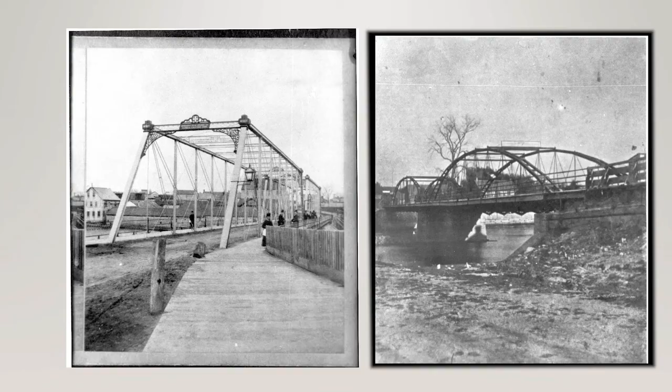For nearly 2 centuries, there has been a bridge across the Otonabee River at Hunter Street, linking downtown Peterborough with the village of Ashburnham, today more commonly referred to as East City. During the first 100 years, there were 4 variations of bridges, 2 wooden structures, and 2 iron bridges, all of which went from bank to bank, spanning 250 feet.

The second bridge, built across the Otonabee in 1846, was the impressive Howe Truss Bridge. This 1876 iron bridge, after 45 years in use, was still considered serviceable, and there were plans to relocate it at a London Street crossing, but it was found to be too short to reach both shores.

In 1901, the Quaker Oats building was constructed beside that bridge. Pedestrian and vehicular travel were often in those days interrupted by railroad traffic, bringing oats and grains to the plant and packaged cereals from the plant, resulting in major traffic delays and frustrated motorists trying to use the bridge, a problem that would be exacerbated by the increasing popularity of the automobile.

On the morning of December 11, 1916, a tragic fire and explosion occurred at the Quaker Oats plant that would ultimately claim 24 lives.

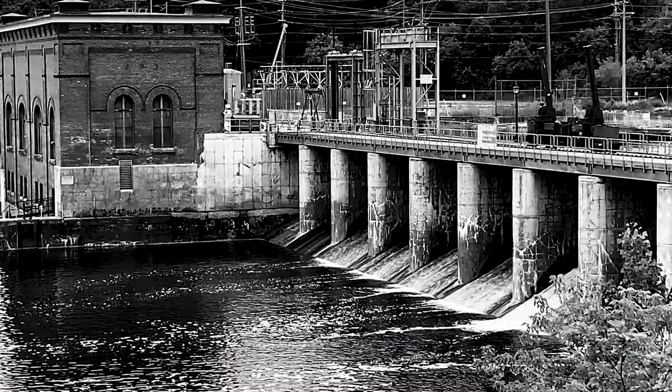Some major restructuring and changes to the bridge design had to be considered to entice Quaker Oats to rebuild and remain in Peterborough. Quaker had spent over $1 million to rebuild the London Street Dam and Power Station in 1912 and was employing 500 workers daily to convert 35,000 bushels of grain into a wide range of products.

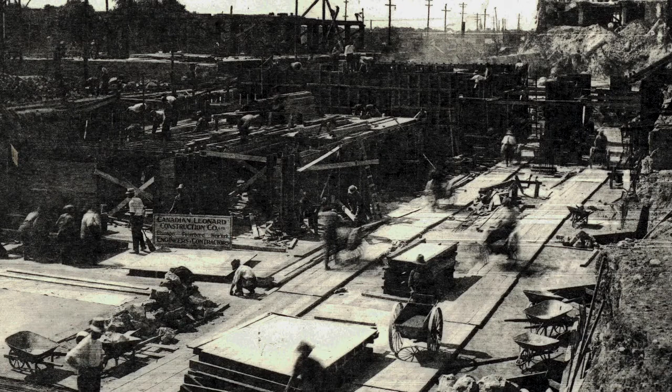After weighing its options and some city negotiations, Quaker Oats made the decision to stay. To reduce automobile congestion, a new bridge design would be required to allow freight trains to pass under the bridge so as not to obstruct vehicle traffic. But to allow this, the bridge's dimensions would have to be much longer and much higher.

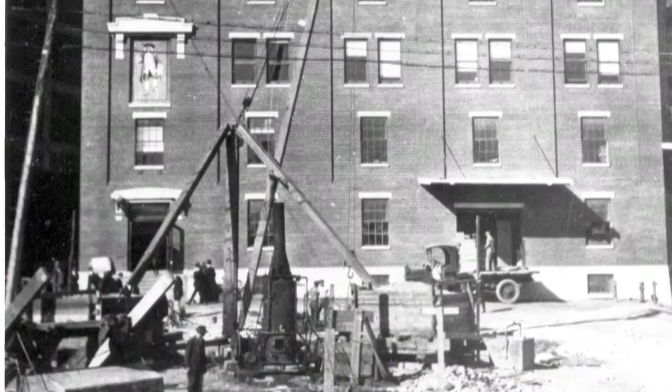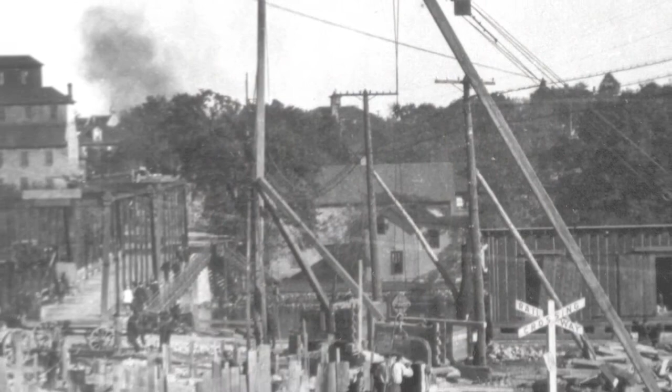Meanwhile, Quaker Oats had decided to increase the size of its factory. The large oatmeal plant completed May of 1918. Construction of the new bridge would start in October the following year.

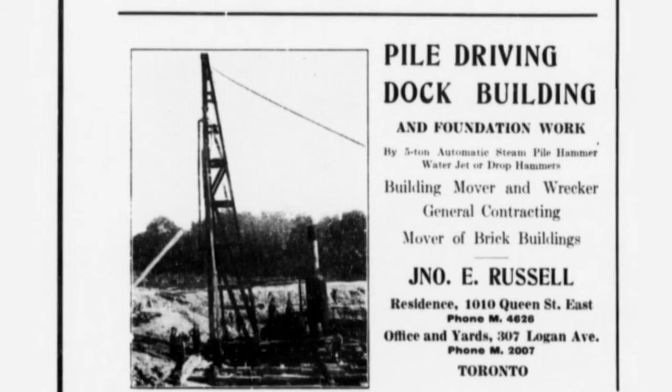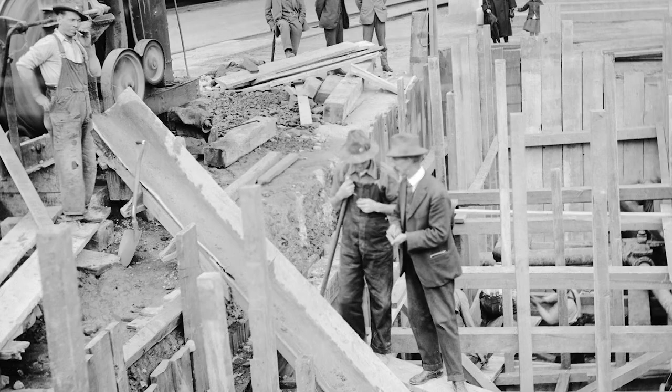A labor shortage caused by Peterborough's strong response to the First World War was being reversed as troops began returning home at war's end. And there'd be a variety of jobs awaiting them, including the building of a temporary bridge, operating steam shovels, pouring concrete, laying foundations, and a number of finishing tasks. A further enticement was the fact the city was paying union scale rates on the bridge project.

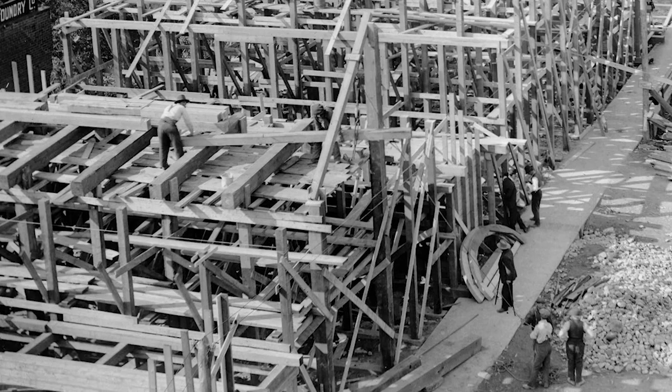It was a golden era for construction workers in Peterborough. The rebuilding of Quaker Oats employed about 600 construction and tradespeople, and building a new bridge, eventually named the Ashburnham Bridge, created many jobs for suppliers and road construction crews.

The city expropriated land adjacent to the bridge, which provided much of the gravel for the project, and would lead to the building of East City Bowl, part of what is now James Stevenson Park.

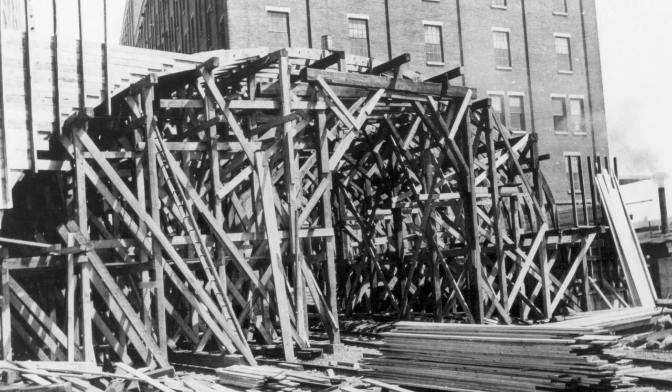Between April 1919 and June 1921, Peterborough's job picture was improving. Men were generally able to find work. Carpenters in 1920 commanded the highest salary before World War II: $6.80 for a 10-hour day.

However, costs were also rising sharply. January of 1917, rent for a 6-room house was between $8 and $14 per month, but in January of 21, it was between $18 and $30 a month.

Pork rose from 25 cents a pound to 39 cents. Milk went from 9 cents a quart to 13 cents. Eggs at roughly 50 cents a dozen in 1917 increased to more than 75 cents a dozen over the next 4 years.

In September of 1918, on the recommendation of city engineer R.H. Parsons, Peterborough City Council chose a young Frank Barber to spearhead the building of the Ashburnham Bridge.

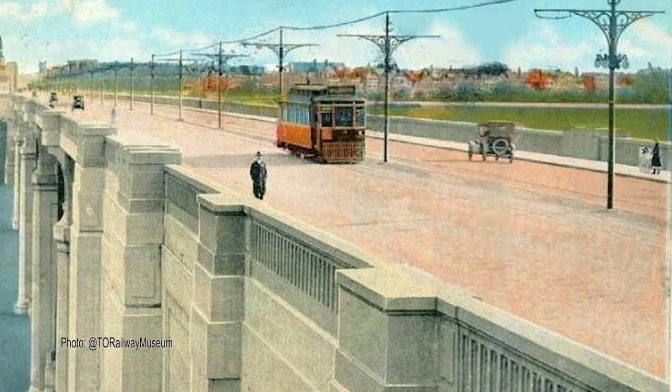Frank Barber had the vision, imagination, and skill to propel just about any project. The contemporary Prince Edward Viaduct on Bloor Street, Toronto, considered Barber's most famous construction accomplishment.

Barber's reputation before building the bridge in Peterborough had been fashioned by his work on other reinforced concrete bridges. Between 1909 and 1918, Frank Barber had built 20 concrete bridges with open spandrel arches across the province, in Peel, York, one in Haliburton, and others in various Ontario counties.

Barber's earlier bridges had clear spans ranging between 40 and 91 feet. At 235 feet, the Ashburnham Bridge was at the time of its construction the longest of any reinforced concrete bridge in Canada and 14th worldwide.

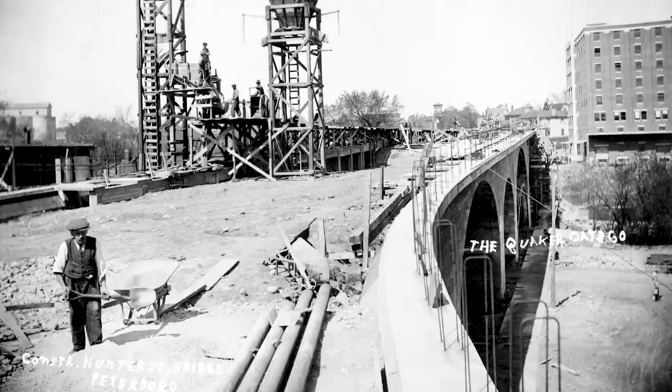It would use 14,000 cubic yards of concrete and 170 tons of reinforcing steel. The original plans called for 17,000 cubic yards of concrete and 250 tons of steel. The president of Quaker Oats, John Stewart, had pushed persuasively for a steel cantilever bridge.

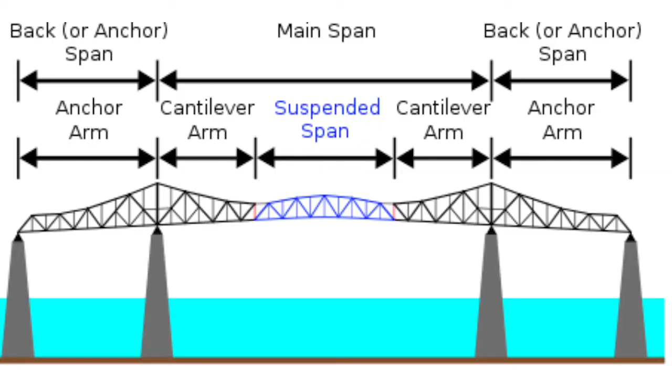Such bridges had recently been built in Quebec City and New York City. But as Barber noted, there were safety issues, and they required frequent maintenance and painting. And in the few years since 1915, the price of building steel bridges had risen faster than that of concrete bridges. It was for those reasons Barber recommended the city build a high-level reinforced concrete arch bridge over the Otonabee.

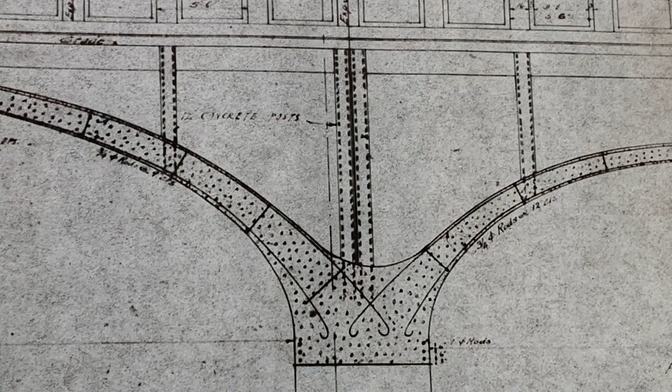He argued that since the first reinforced concrete bridge had been built in 1889, technology had improved significantly. Engineers were able to calculate more closely the impact of traffic on bridges and could design bridges with more elasticity. Concrete bridges could look very heavy, but engineers and architects were more aware that the weight of the bridge could be lightened, especially by having open spandrels in the arches.

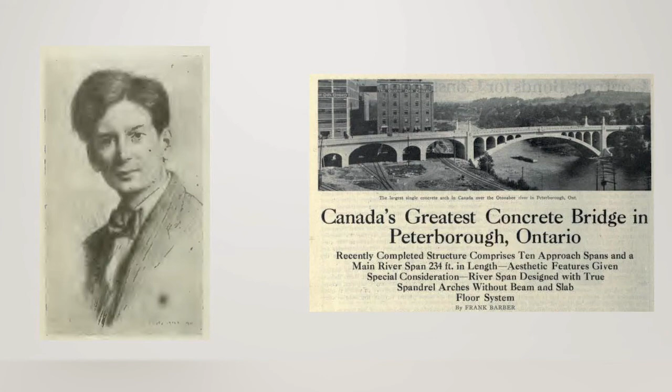Several articles, many written by Frank Barber himself, appeared in the publication Canadian Engineer that discussed aspects of concrete arch bridges. Barber also thought there would be less stress on the central arch if one applied principles of elasticity to the skewback and the crown. Elsewhere, Barber discussed how to design concrete curves in arches to ensure load bearing was even. After calculating the weight of the floor system and the depth of the arch ring, the engineer could then change the depth of the arch to reflect dead load stresses.

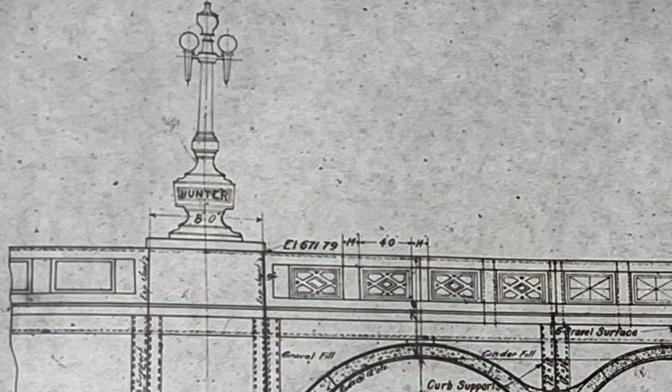Though Peterborough City Engineer R.H. Parsons estimated the cost of the bridge at $300,000, ratepayers in 1918 approved only $245,000. Tenders were called, and of the 10 companies that looked at the plans, only 3 submitted quotes, ranging from just under $340,000 to just over $380,000. None was accepted, and the incoming 1919 City Council was forced to pick up the pieces.

The mayor and aldermen considered a number of changes to the bridge in an effort to stay within the ratepayers' most recently approved $270,000 figure. With the post-war drop in steel prices, might it now be feasible to build the bridge with structural steel or wrought iron instead of concrete?

Frank Barber, still the consulting engineer, persuaded City Council to stay with concrete. He reviewed expense estimates with those given by contractors the previous year and was convinced he could cut costs to an acceptable level. A new call for tenders for the concrete high-level bridge design with an April 1st, 1919 deadline garnered 13 submissions, with bids ranging from $260,000 to $300,000.

The Board of Works, acting as the bridge committee, then tried to get new quotes with a guaranteed total, but fluctuating wage demands made that impossible. Council had insisted on union scale for skilled and unskilled workers, and there were fears many costs might rise over the anticipated 2-year-long lifespan of the project.

3 of the 13 bids drew some support from the 5-member Board of Works and 11-member Council, and after dealing with several injunctions raised over Council's exceeding its authority by accepting a bid of more than $270,000, and charges by Ashburnham citizens that Council had delayed the construction of the bridge for far too long, Mayor Duncan, on July 15, 1919, signed a deal for $300,000 with the Toronto firm Russell Townsend Contractors, which had its own cement plant and was well experienced in the building of concrete bridges.

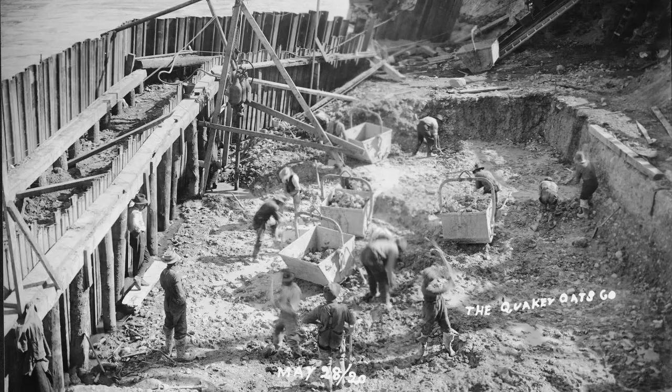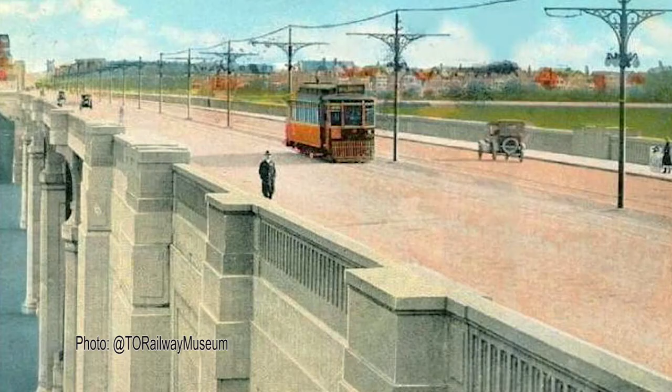It had actually been Barber who had persuaded John E. Russell, the wizard behind the Toronto waterfront, to consider overseeing the construction of the new bridge. Russell had a sterling reputation for building roads, and one of the contractors on Barber's great Prince Edward Viaduct project in Toronto.

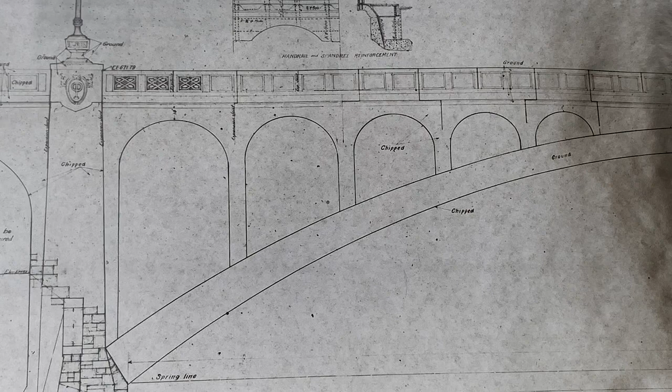Russell's partner, Charles J. Townsend, would be in charge of the on-site details of the project. In the publication Canadian Engineer, Barber claimed the construction throughout, with the exception of the central or river arch, is of reinforced concrete, and with the exception of the joints at the skewbacks and crown, there is no steel in the river arch. In order to reduce the weight on the central arch, the roadway was filled with cinders rather than loam. Barber said he could reduce the shrinkage in the concrete by shooting dense sand cement mortar into the joints when the temperature was at 45 degrees Fahrenheit, deemed Peterborough's average annual temperature.

After a short break, we'll have more on the building of the Hunter Street Bridge.

Claude Fayette Bragdon, a New York architect, author, and theatrical set designer, gave the bridge its good looks. Architecturally, Bragdon was influenced by Louis Sullivan, a major Chicago architect, and by the arts and crafts movement. His major architectural works were First Universalist Church, the Chamber of Commerce building, and the New York Central Railroad station in Rochester.

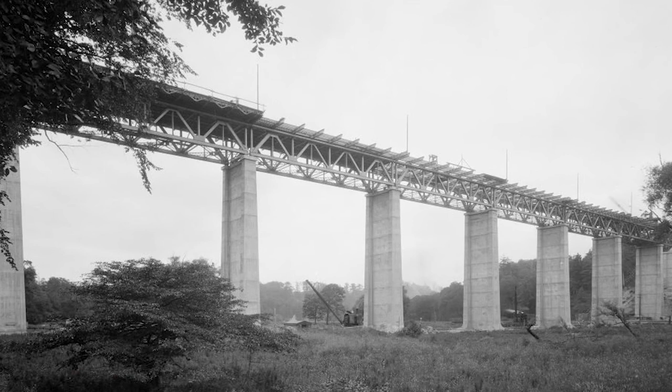Barber had already been working on several concrete truss bridges in Ontario, including two with Bragdon: the 1917 Leaside in Toronto and the 1919 Valley Inn Bridge in Hamilton.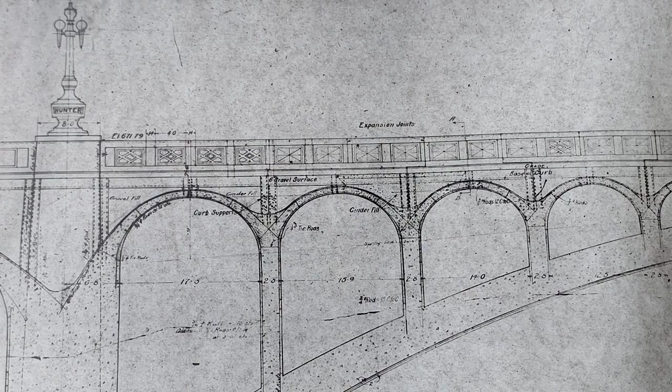The Peterborough design was completed in November 1918, but Bragdon was back working on the bridge plans in early 1919. Peterborough's new city council members wanted to reduce costs on the bridge, and Bragdon had to make the roadway narrower, so the planned streetcar line to Ashburnham was scrapped.

Also, instead of going the full length of the bridge, the terracotta panels, also called faience, only appeared in the railings above the central arch. Those terracotta rosettes were inspired by the Roman Temple of Mars, and when designing the panels, Bragdon consulted the Atlantic Terracotta Company in New Jersey, which at the time monopolized the production of architectural terracotta. Some of the replacement panels for a bridge restoration in the 1990s came from that same New Jersey company.

From a design perspective, the bridge was much longer than earlier bridges, partly because it was so much higher. That meant the approaches began some distance from the river, which augmented the curvature of the bridge. The roadway was a distinct S shape, though interestingly, when working on the perspectives or the view of the bridge from a distance, the visual effect is that the bridge is straight.

The defining characteristic of this bridge is the central arch, with 10 internal arches placed between the central arch and the roadway. This open spandrel, a design signature of Barber's work, proved practical when building a long arch as the weight of fill in the spandrels was less. It required more complex framing, but far less concrete. This became a feature of reinforced concrete bridges, such as the Ashburnham Bridge, because of its attractiveness and the fact that steel reinforcing gave added strength.

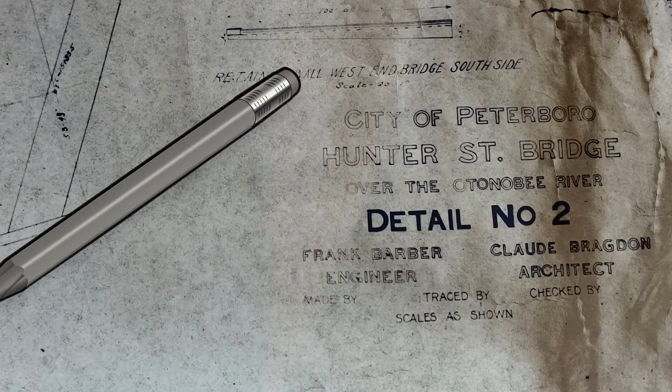The relationship between the architect and the engineer is often mysterious. In this case, Frank Barber hired Claude Bragdon, with whom he shared important information. Barber set the limits, but Bragdon handled the design and aesthetics, and it proved a fortuitous partnership.

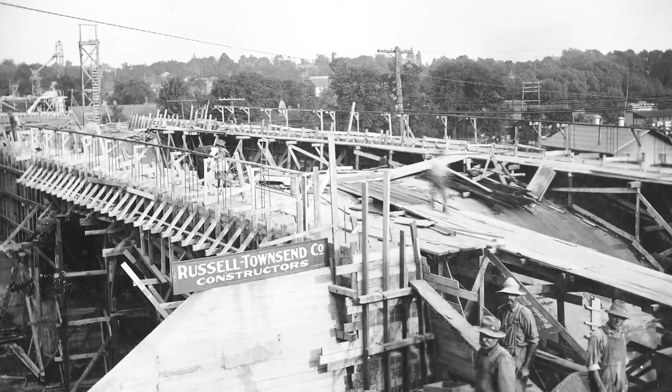The building of such an impressive civil engineering project of necessity had political implications. City councils were elected for one-year terms, and the bridge was built over four council years. J.J. Duffus was mayor in 1918 and deserves much credit for getting the project started. Every council had to deal with the bridge, and each seemed nervous about the project, in part because of increasing costs in an economy experiencing a downturn.

Still not completed in July of 1921, the City Council of the day was getting increasingly anxious, and Mayor McIntyre, a contractor by trade, called a special meeting of council with a view to winding up the project and to plan an official bridge opening for August 8th during the 1921 Civic Holiday.

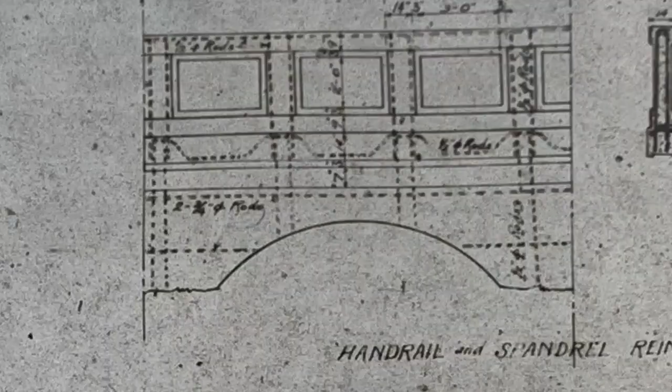Council had the idea that the original contract could be terminated and the remaining work done by city employees supervised by the Board of Works of City Engineer R.H. Parsons. The view seemed to be that placing the railings and chipping the bridge finish was all that remained to be done.

The chipping was protection for the concrete, and its brown tones were meant to complement the rosettes and suggest the bridge was rooted in nature.

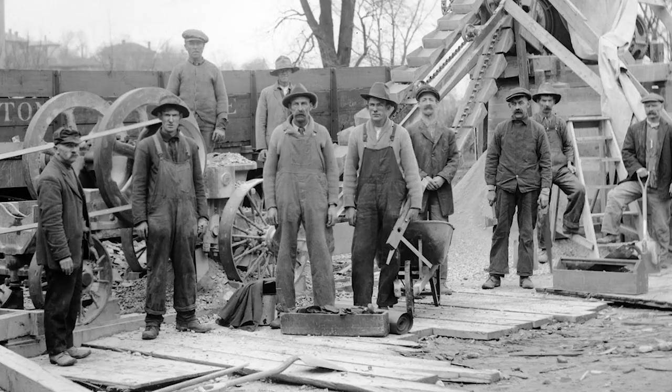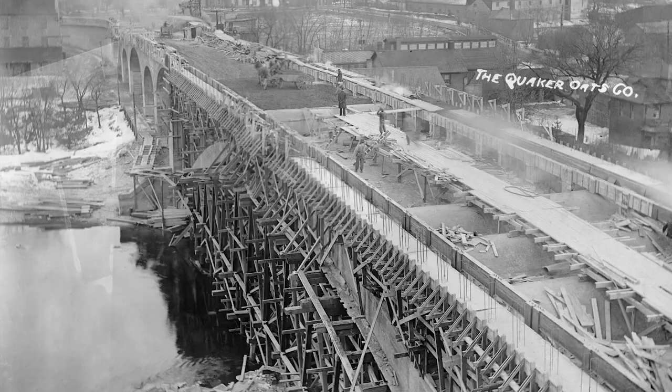But people clearly liked the bridge's appearance, with its decorations that could easily be viewed from the roadway. The bridge was one of Canada's major construction projects and regarded as its safest. Yet the Examiner, the last standing of Peterborough's three daily newspapers, had consistently been quite negative about the bridge, regarding it as too expensive and less important than a new sewage system would have been.

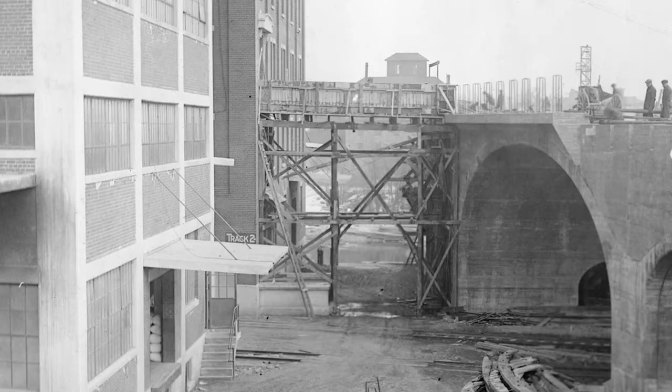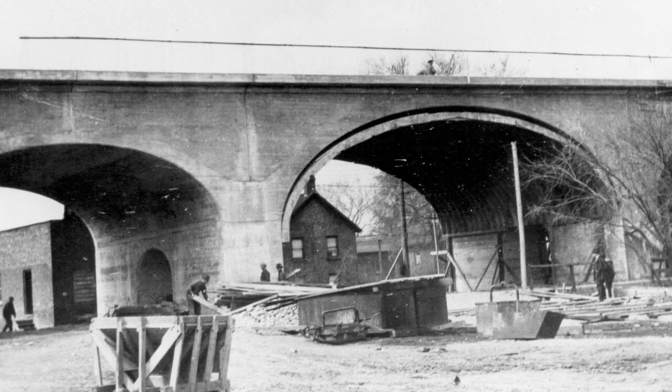It was perhaps due to sensitivity to that criticism that Council tried to hasten the final stages of its construction and to dictate what costs the city should pay. But it could not act unilaterally, certainly not without the approval of Frank Barber, and Council was forced to backtrack, with some embarrassment felt by the aldermen who had supported the belt-tightening measures.

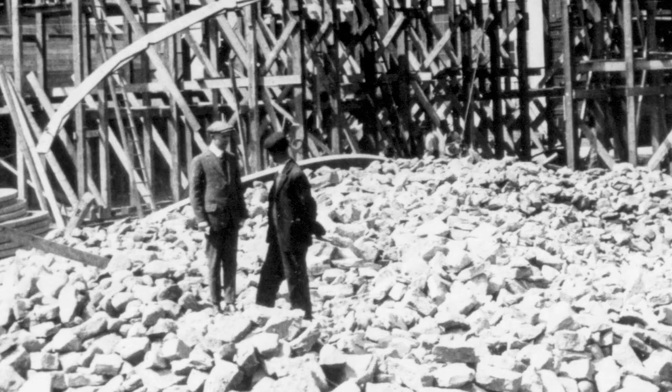Barber believed the contractors had done what was expected and had done so with due care to safety and professionalism. And so those workers stayed on the task of completing the bridge.

One local writer, C. Hamilton, characterized the bridge as a massive and handsome structure spoiled by the insertion of those tawdry green tiles. Another commentator claimed the display of hues on the bridge rivaled anything seen outside Barnum and Bailey circus wagons.

At a subsequent special meeting, members of council were quick to apologize for some of the termination rhetoric. Alderman Turner expressed his wish to withdraw anything that might have been construed to have meant the contract was not carried out to the best of their abilities and within appropriate time limits.

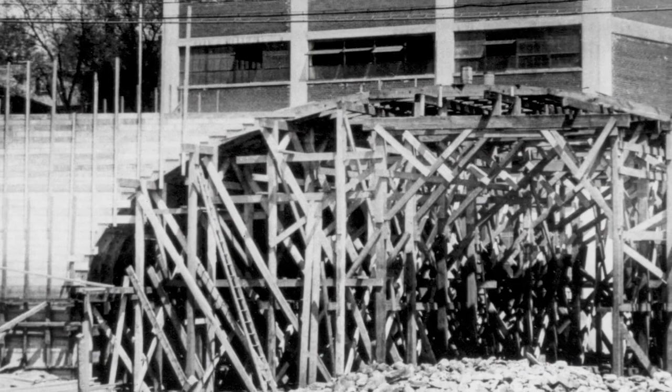Alderman Gordon, who had seconded the initial motion, added, "There was no desire on the part of any member of this council to reflect on the integrity or the ability of the Russell Townsend Company to carry out the contract well and properly." Council's only intent, he maintained, was to terminate certain overhead expenses and to wind up the work as soon as possible.

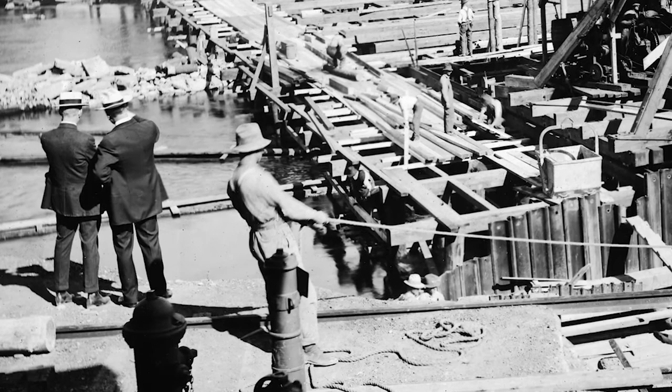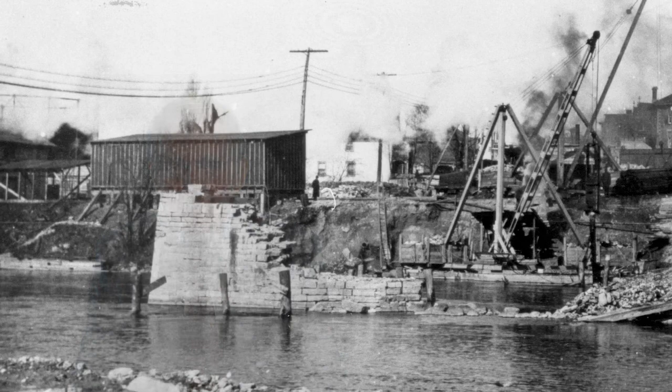One letter to the editor on July 27th from one who worked on the bridge made an interesting point. He thought that if Alderman Hamilton knew the workers did not do a normal day's work, he should have at the time informed the contractors, one of the superintendents, or one of the 6 foremen. He thought it was reasonable the city had specified workers had to come from the city. He added, "It is the working men of this city who have paid the biggest share of the expense."

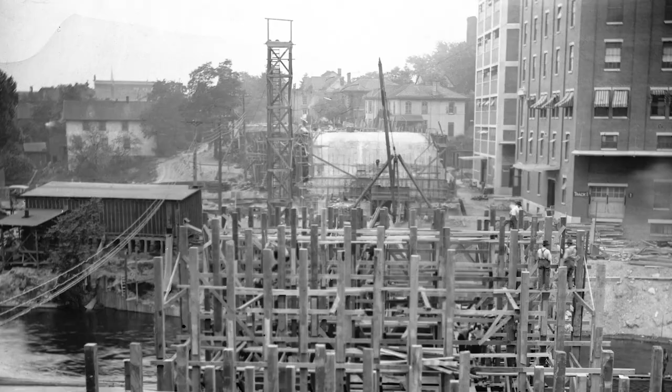He also noted that the alderman commented on money wasted on wages, but said nothing about other wastes, such as runways built that turned out failures, and a tower built twice as high as necessary for the work it was intended to do.

Arrangements were made to have the official opening on the bridge platform by the main entrance to Quaker Oats. The Honorable Dr. John Dowsley Reid, the Federal Minister of Railways and Canals, accepted the invitation to open the bridge on Civic Holiday Monday, August 8th. However, on August 5th, he had to cancel because the government of Arthur Meighen was meeting the new Governor General, Lord Byng. This meant no other cabinet minister would be available to attend either.

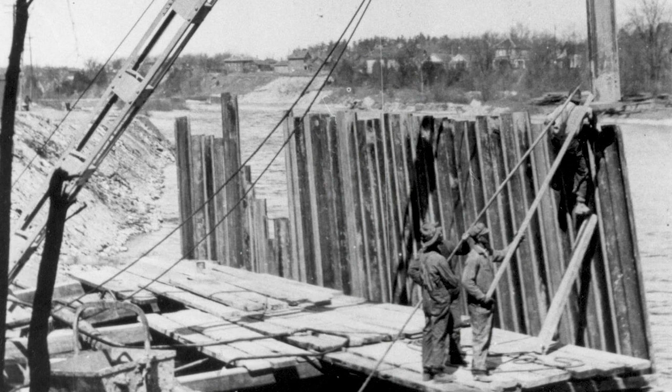The final compensation for Russell Townsend was settled near the end of August. The claim for extra work had been at $13,600. The city wanted to pay an even $5,000. Townsend would accept nothing less than $6,500, which had been the figure in the second motion on the day of the termination motion. After further review, Council accepted the compromise on September 7th.

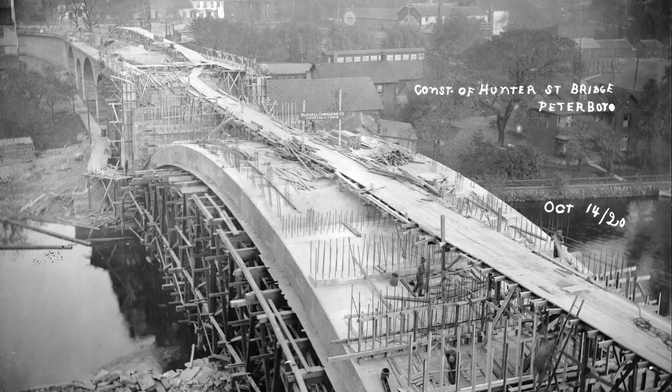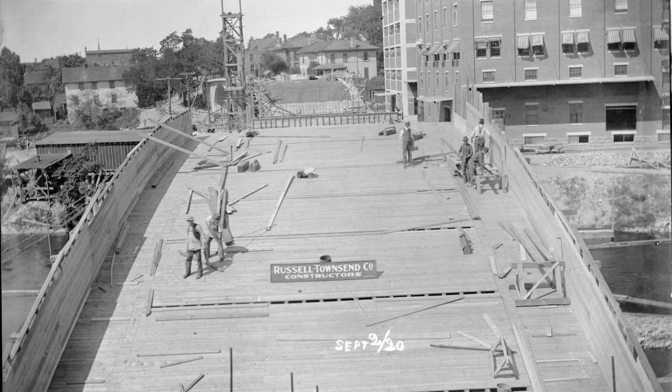In his remarks, Townsend called the project a bad job for them. The company made little money and suffered from the negativity of the Examiner and City Council. That said, Townsend observed, "It's one of the biggest structures built in Canada without loss of life." That, he offered, was some consolation.

As stated earlier, the bridge's original design was wide enough to accommodate a streetcar service to Ashburnham. But as we also learned, it was narrowed in an effort to save money, and plans had to be redrawn. On the bridge's completion, City Council approached the Hydro-Electric Power Commission, which had acquired the local power companies and the streetcar service 7 years earlier, to see if it were still possible to have a streetcar service using both the Ashburnham Bridge and the Inverleigh Bridge. When that option was priced, including the cost of 1 or 2 streetcars, Hydro engineers determined it wouldn't make economic sense, and that a bus service might be a suitable solution for the transportation of people between Ashburnham and Peterborough.

As it turned out, in 1927, Hydro would replace its streetcar service in Peterborough with a fleet of buses. And while the Peterborough Examiner was pleased with the money saved by the bridge's reduction in width, its often critical view of the structure prevailed unfairly. But on the whole, people were pleased with the bridge. It had been a major accomplishment and would become increasingly important in the years that followed.

The final tab for the bridge has been placed at $520,000. It's unknown if that figure included Barber's fee of $50,000. Regardless, the bridge would be finally paid off in 1950, amortized over the best part of 2 generations of Peterboroughans, for most of whom it was a symbol of civic pride.